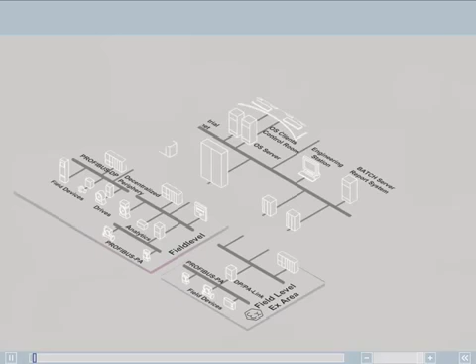The aim of any migration is the modernization or expansion of an existing technical base in a plant without the system crashing and without stopping the plant. At the end of the migration process, the existing system is supported by a far more powerful and more modern system: Simatic PCS7. In this section, you will find out more about this forward-looking process control system, the goal of the Siemens migration strategy. For genuinely comprehensive automation, Siemens developed totally integrated automation for the process automation market.

Totally integrated automation is a complete range of products, systems, and solutions for total vertical and horizontal integration in all process industries. Totally integrated automation is applicable to both the processing and manufacturing-oriented industries. Totally integrated automation opens up new potentials for increased productivity by integrating, based on a single platform, the entire production chain from incoming goods through production to the outgoing product.

At the same time, it connects all levels of the enterprise, from the field level to production management level to ERP level. Comprehensive integration with totally integrated automation also means the harnessing of hidden potentials due to continuous observation of the entire production life cycle. Simatic PCS7 is the totally integrated and homogeneous automation solution for all process industries. It is based on standard components of totally integrated automation, such as HMI, software, controllers, etc.

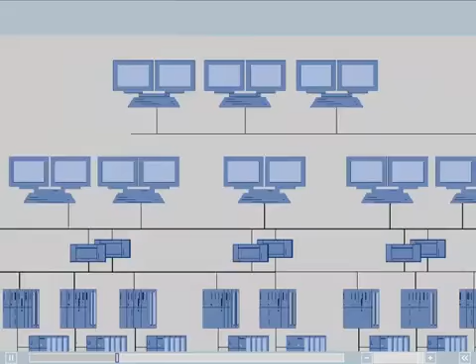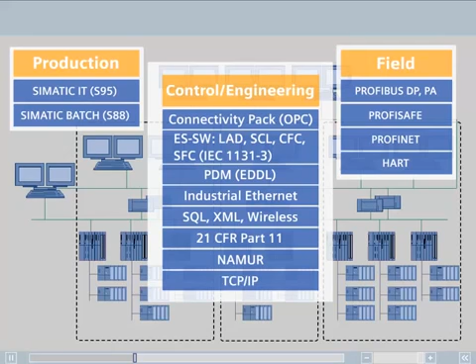Simatic PCS7 covers not only the process control tasks, but also the entire automation of all preliminary, follow-up, and parallel processes at a production site. In addition to the standard Simatic hardware and software components, Simatic PCS7 also uses standardized interfaces for data exchange, based on international standards such as Profibus or HART. At the same time, it also uses new, powerful technologies and internationally established industrial standards, such as IEC, XML, Ethernet, TCP/IP, OPC, ISA S88 or S95, and therefore remains open for future developments.

One of the major advantages of Simatic PCS7 is its scalability. It is equally successful in a small laboratory operation or in a large complex with over 100,000 IOs. This guarantees total flexibility when expanding functionality or the scale of the operation. With the simple inclusion of optional packages such as Simatic Batch or Simatic Route Control, the system can grow to keep up with users' demands.

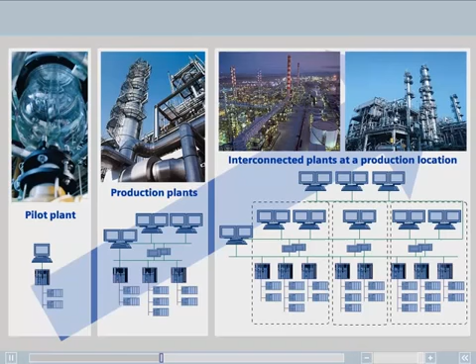To integrate distributed field technology, Siemens uses Profibus, the most successful field bus worldwide. Profibus is straightforward, resilient, and reliable. It supports redundancy and online expansion, and is suitable not only for standard but also hazardous environments. With its all-round scalable redundancy, our process control system increases the availability of every plant at all process control levels. This guarantees trouble-free operation and helps to avoid downtimes.

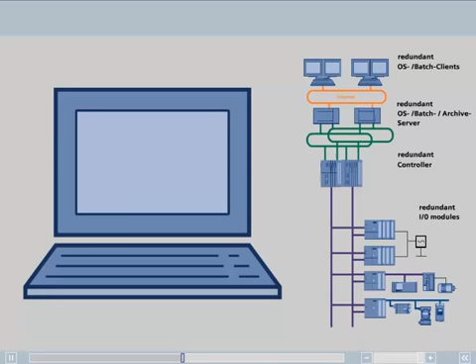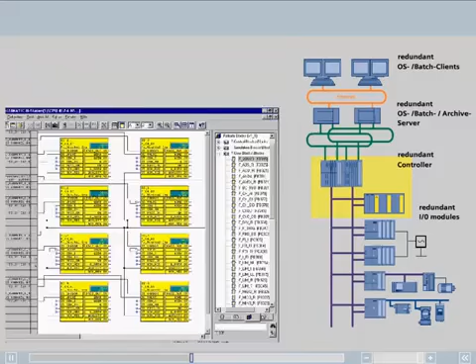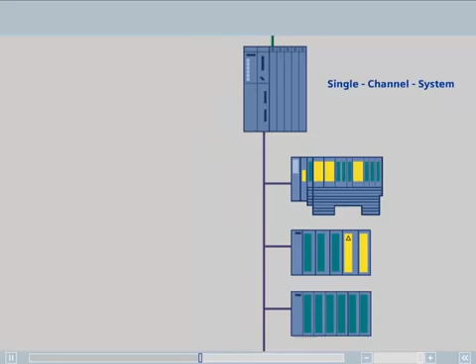Integrated fail-safe technology is a further step toward a fail-safe automation system. Simatic PCS7 is capable of recognizing process faults and internal errors. With configurable shutdown logic, the plant can be brought to a safe state. Fail-safe automation systems can be configured as a single channel, a fail-safe system with one CPU, or as a redundant system known as an FH system. We offer these safety features to our customers naturally with TÜV certification up to AK6 or SIL 3. The fail-safe configuration is created with the standard PCS7 engineering tool.

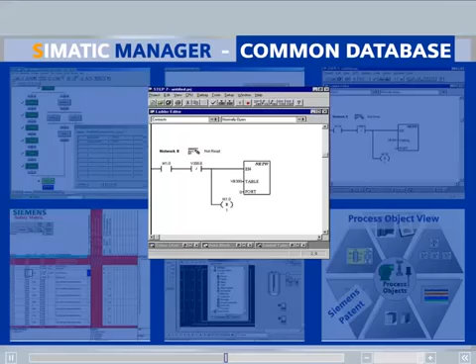All Simatic PCS7 hardware and software components are configured with a single engineering system. Thanks to a user-friendly, fully graphical user interface, a technology-oriented configuration can be created without any programming knowledge. The engineering system of Simatic PCS7 has a set of complementary tools for system-wide project-oriented engineering, from configuration of field devices to redundant and non-redundant applications, right up to configuration of fail-safe applications.

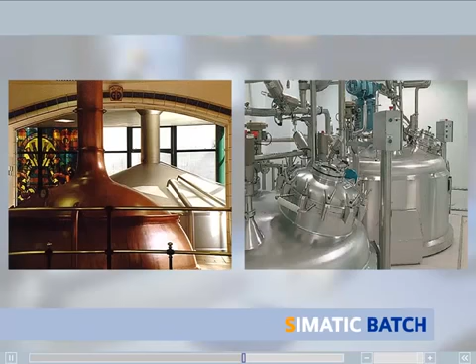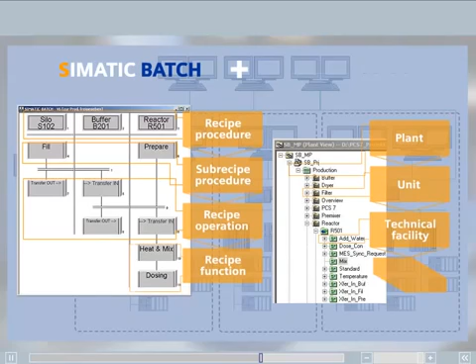Simatic Batch can be used for process plants with complex batch processes or regularly changing control sequences. This is an option that is completely integrated in the operator control and monitoring strategy and in the engineering of Simatic PCS7. Simatic Batch can be configured either as a single workstation system or as a client-server system, and because of its modular architecture and flexible scalability, it can be used in process cells of any size. Together, Simatic Batch and Simatic PCS7 fully cover the process and recipe models described in the ISA S88.01 standard and simplify the process engineering-oriented creation of recipes.

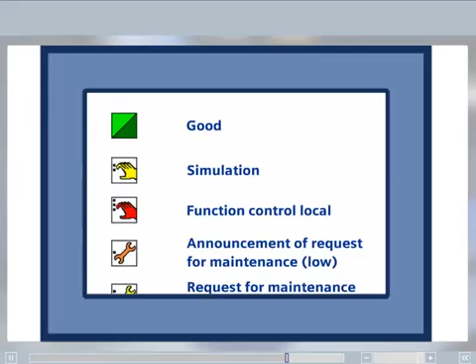To protect capital investment, we have introduced integrated asset management in Simatic PCS7, allowing predictive maintenance, repair, and servicing. We place particular importance on automatic functions for monitoring field devices and other plant components by acquiring measured values that characterize the status of equipment and machines. With Simatic PCS7, the process control system in the enterprise-wide automation system for totally integrated automation, you have Siemens quality from one source. All the system components are developed and maintained internally.

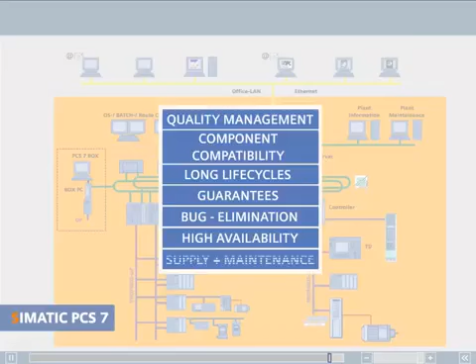Operator control and monitoring systems, flat screens, PCs and input devices, OS servers, archive and batch servers, controllers, network cabling, standard PLCs and text displays, field devices, analysis devices, compact controllers, drives, drive controls, low voltage switchgear, and MIS/MES components. What this means for our customers is comprehensive quality management, tried and tested component compatibility, products with a long life cycle, comprehensive guarantees, fast elimination of bugs, high availability, and long-term availability of supply and preventive maintenance. This, of course, also includes worldwide service and support around the clock.

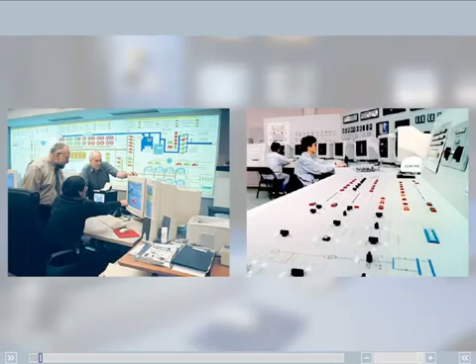According to international studies, there are several thousand plants worldwide that require thorough modernization, or at least expansion, to keep them competitive in the market. This means that the topic of migration, especially with regard to process control, is becoming increasingly more important to plant operators, since migration generally means the staggered transition to a new technical generation.

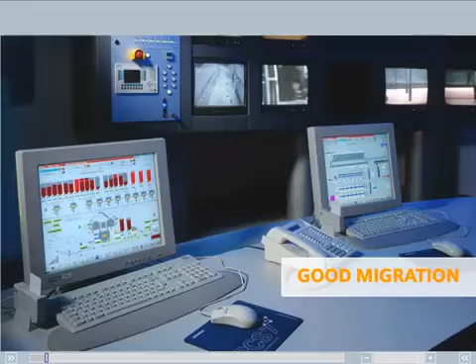Accelerated by the waves of innovations in IT and PC technology, the life expectancy of process control systems has changed drastically. While a working life of 16 to 20 years for engineering and operator consoles was considered normal in the 80s, today such life cycles have been reduced to about 5 years. The short innovation times have less effect on closely process-related components such as controllers, I/Os, or field devices.

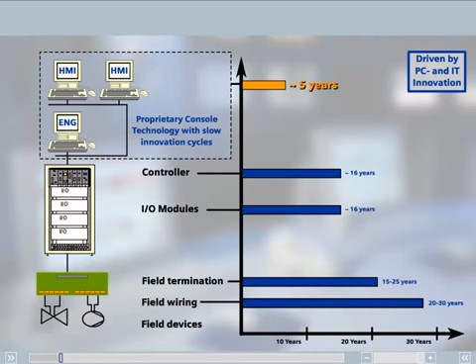Operator control and monitoring systems, or HMI, on the other hand, are under much greater innovative pressure and are therefore renewed much earlier. To guarantee the functionality of the plant, old and new must be integrated side by side throughout the plant. There are numerous reasons why migration to modern state-of-the-art systems becomes necessary.

The risk of failures increases greatly in plants that have been in operation for decades. The vendor of the process control system being used decides to terminate further support for the system. The costs for upgrades, expansions, and for maintenance increase rapidly for old systems. The existing system no longer meets the current requirements. It is simply no longer possible to expand the system as would be necessary to remain competitive.

In times of increasing production demands caused by pressure from end users and increased expectations in terms of quality, the inability to expand alone often makes migration the only possible option. The customer can, however, expect even more from a successful migration. Low downtimes in operation thanks to migration. Protection of investment in hardware and software. Long-term reliable operation of plants. High standards of quality of the new components. Simple operator control. And very maintenance-friendly.

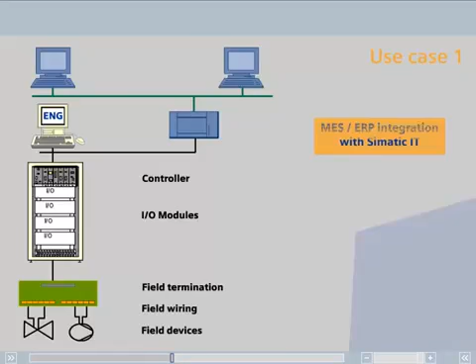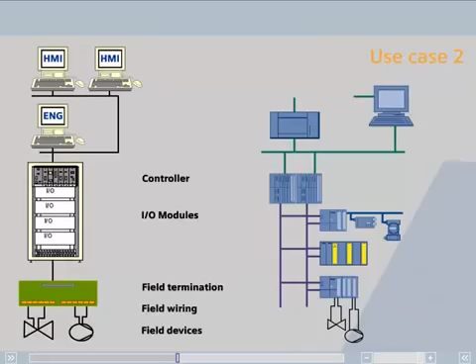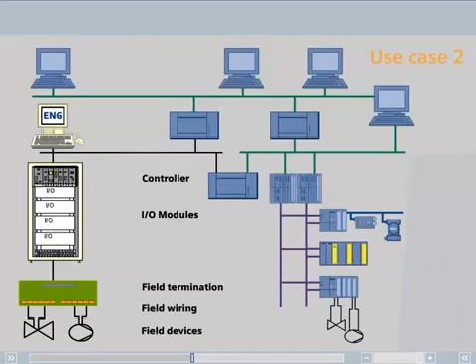When expanding an existing plant, the old system initially remains in place. Only new plant sections are equipped with Simatic PCS7. Old and new continue side by side in mixed operation, with a common operator interface. Controller communication is implemented using a gateway. This gradual modernization, starting with the new plant section, provides not only greater transparency for the operator, but also functional expansions such as field bus technology, IT integration, and totally integrated automation, etc. As requirements grow, the system can be further expanded with Simatic PCS7.

The discontinuation of a process control system by the vendor, in other words, discontinuation of further development and support, is the main reason for a comprehensive plant modernization. The need for functional expansion, or the desire to avoid plant downtimes, can also be the motive for modernization. Whatever the reason, the old control system is replaced by the modern, forward-looking Simatic PCS7 process control system. In some cases, without interrupting plant operation, the existing field devices are connected over termination adapters. This protects prior investment such as field wiring or hardware components, as well as the valuable application engineering.

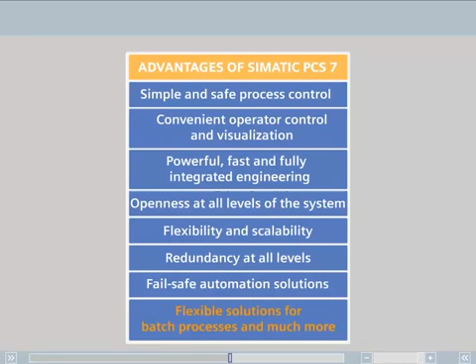Following modernization, all the advantages of Simatic PCS7 as part of totally integrated automation are available, such as simple and safe process control, convenient operator control and visualization, powerful, fast, and fully integrated engineering, openness at all levels of the system, flexibility and scalability, redundancy at all levels, fail-safe automation solutions, flexible solutions for batch processes, and much more.

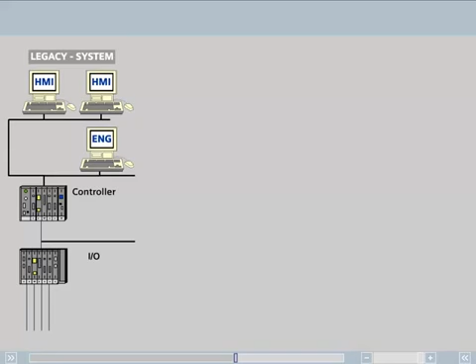We support these three typical migration situations in each individual step with the products we have developed. 1. Replacement of the old system with the Simatic PCS7 operating system that controls the plant moving forward. 2. Creation of the engineering libraries for PCS7 AS and OS, FP. Here, the valuable configuration information from the old system is adopted.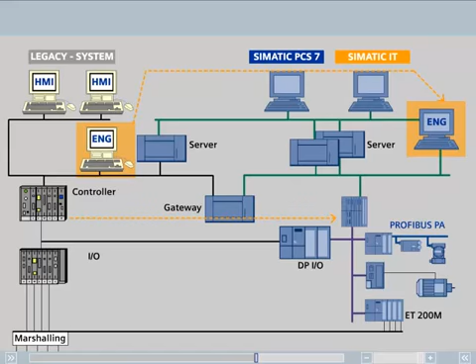3. Introduction of network gateways, developed for trouble-free exchange of information. 4. Creation of interfaces to PCS7 for I/O modules of other vendors. 5. Use of field termination adapters for PCS7 that ensure that the existing field wiring is retained. Each step is supported by specific services.

Within the concept of our individual migration strategies, the migration products rank equally alongside standard products. For our customers, this means worldwide guarantees of sales support, regular preventive maintenance, hotline support, reliable support for all system components, long-term reliable operation of plants, and secure investment in migration. At the same time, the maintenance of existing older systems is also part of the Siemens strategy.

It goes without saying for Siemens that migration of our own control systems to Simatic PCS7 is an essential cornerstone of our continued business relationship with our customers. Since 1996, we have been providing migration solutions for the smooth transition from Teleperm M to Simatic PCS7 and have modernized thousands of plants. In the meantime, we have also successfully implemented migration procedures from APACS+ and Simatic 505 to Simatic PCS7. In recent years, Siemens have proven their expertise in numerous successful migration projects.

Our specialists worldwide have years of experience in engineering, commissioning, and service. They can inform you about the migration options, analyze the plant, advise you individually, and then provide you with a detailed proposal. Today, we can also offer migration solutions for control systems from other vendors, such as Bailey. Migration solutions for other vendors such as Emerson, Honeywell, Invensys, and ABB are either being planned or on the way.

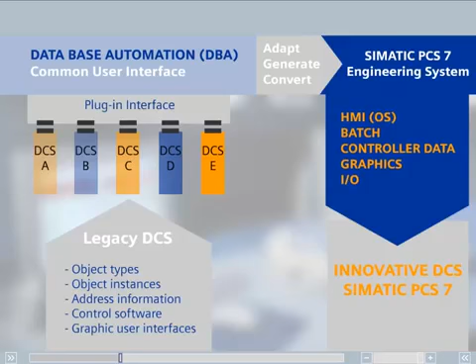This technique creates a universally valid migration infrastructure that permits simple docking to different process control systems, thanks to the module architecture. DBA allows migration of OS, batch, and controller data, and creates a consistent look and feel for every control system migration. DBA is, of course, fully integrated in the engineering system of Simatic PCS7, allowing genuinely uncomplicated and homogeneous migration to the PCS7 target system. This has been proven in many migrations from our own as well as from various systems from other vendors.

DBA transfers the process data of the old system to PCS7. This includes the plant view or plant hierarchy, process tag types and process tag instances, standard faceplates, batch data, recipes, etc. Siemens also provides a graphics conversion service with which existing graphics of certain old systems can be converted for use in PCS7 at a fraction of the cost of a new configuration.

The migration technology described here is incorporated in the migration products that are now available on the market as standard products for a variety of old systems. Care was taken to ensure that these products fully support the typical use cases with which you are familiar.

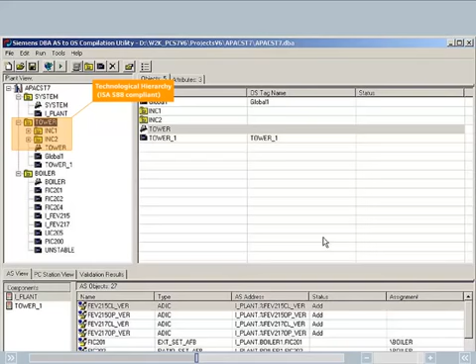To complete this section, let's have a brief look at the user interface of DBA. In the next section, the practical part of our presentation, you will see its strengths in greater detail. The hierarchical plant view, complying with ISA S88, is used to group and display a project according to technological aspects. Process objects are presented clearly according to the plant hierarchy.

The process object view displays all aspects of the individual process objects in the form of a table. Here, names, types, and addresses on the controller are displayed, and their relationships indicated.

This section provides 3 typical conversion examples. The procedure will use an APACS+ conversion as the example, but the procedure for other systems like Infi90 from Bailey is the same. In the first use case, the existing APACS+ system operator station is to be replaced with a new PCS7 operator station in a client-server architecture.

The PCS7 APACS+ OS server is connected with the system bus, the M-bus, and therefore has access to the subsidiary APACS+ controllers. Via the OS Ethernet network, the PCS7 OS clients are connected to the engineering system. All the engineering is done on the engineering system, and from here the application software is downloaded to the server and the client.

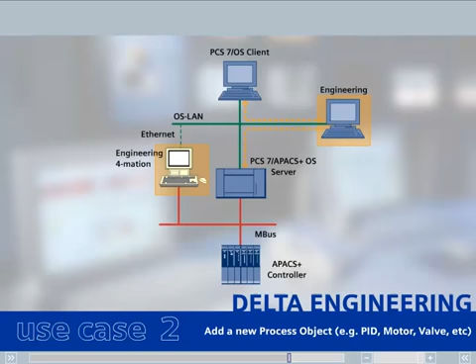In the second use case, we would like to show how the existing plant can be extended by a new measuring point, using the remaining legacy engineering console 4-mation. This change will be detected in the engineering system, and the changes are downloaded into the PCS7 APACS+ OS server and the PCS7 OS client, online.

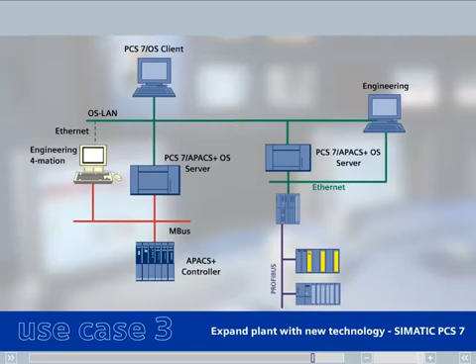In the third use case, the existing plant will be extended by a sub-plant based on Simatic PCS7. In addition to the present server, an additional PCS7 OS server will be added and connected to the OS network as well. Based on that connection, the operator, sitting on the PCS7 OS client, has a common and consistent monitoring and operating for both parts of the plant.

Welcome to the practical part of the multimedia presentation, Migration Strategy of Simatic PCS7. Here, we would like to present 3 different migration use cases. The first migration use case shows how an existing HMI is replaced by a modern PCS7 operator station. You will see how the migration products work and how easy they are to work with. You will also see how the migration products not only save a tremendous amount of time and effort, but also how they exclude accidental errors right from the beginning.

In the second use case, a process tag is added to an existing plant. This is inserted online in the operator station during operation without affecting process control. In the third and last use case, a plant is expanded by a new section using PCS7. The operator should be able to control and monitor the new section of plant alongside the previous or legacy system.

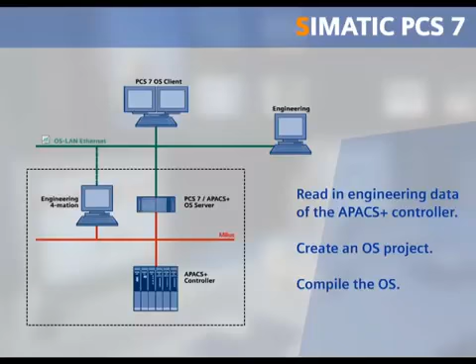In this use case, an existing database with the engineering data of an APACS+ controller will be read in by DBA, and the picture hierarchy will be set up for the OS in DBA. An OS project will then be created, and this will be specified as the target project for all pictures. In the last step, the OS is compiled, and the tags, messages, and picture hierarchy are automatically created with all the necessary pictures. The block icons of the process objects are also created, and they are assigned to the faceplates.

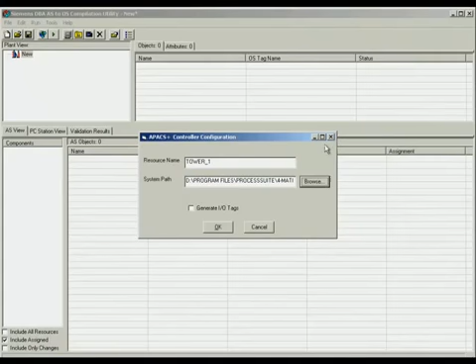The first step is to open a new project in DBA and to browse for the engineering data of the 2 controllers to be controlled and monitored from the operator station. The databases I_PLANT and TOWER_1 have the status changed because the objects that have been read in have not yet been used on the OS.

The Update Controller Objects function reads all objects contained in the 2 controllers and displays them in the table with their names, types, and addresses on the controller. The assignment column is empty, since no process object has yet been assigned to an OS. By selecting a controller, the corresponding process objects are displayed.

With the Auto Assign function, all the process objects of Tower1 are assigned to a Templates folder in the plant hierarchy. The Templates folder has a subfolder called Tower1, and this, in turn, has 2 further subfolders with the names Inc1 and Inc2. Inc1 and Inc2 are hierarchy levels that already existed in 4-mation, the engineering tool of APACS+.

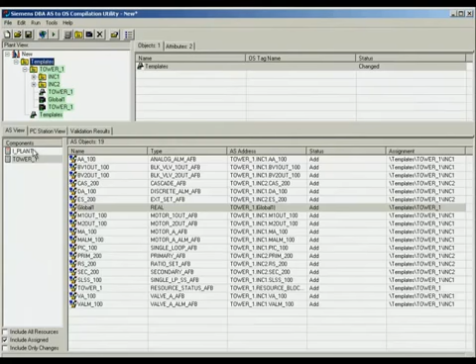Here, we can see one of the advantages of DBA that always pays dividends when the original engineering data has a hierarchical structure. DBA then evaluates this and automatically sets up the picture hierarchy accordingly. As always, you have the option to set up the picture hierarchy manually, based on your own criteria. The procedure for I_PLANT is analogous. For the picture hierarchy on the OS, the two folders are now moved to the first level.

The objects remaining in the Templates and Templates 1 folders are not required on the OS, and both folders are therefore deleted. The name Boiler 1 is now changed to Boiler, and Tower 1 to Tower.

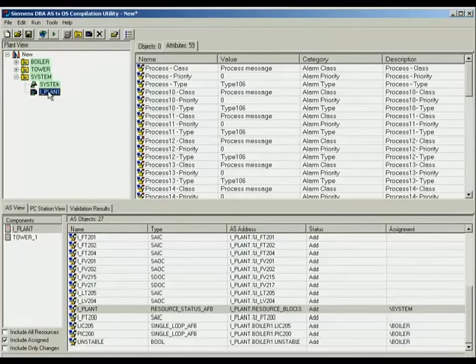To obtain an overview of the status of the I_PLANT controller, the resource status is stored in a separate picture. In the overview of the OS, System will be the first entry, followed by Boiler and Tower. System is therefore located at the top of the plant view hierarchy by DBA.

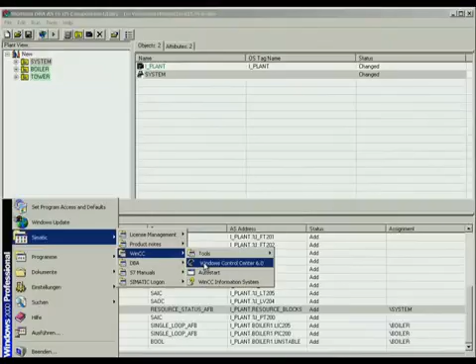The OS can only be compiled if the OS project has been created and assigned in DBA. The OS project is created in the Windows Control Center. The project editor then needs to be run, so that various basic settings such as the resolution of the monitor can be made, and to copy required files to the project.

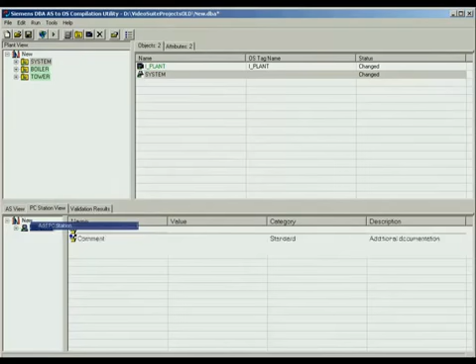A screen resolution of 1024 by 736 is used here instead of the recommended 1280 by 1024 or 1024 by 768 screen resolution, in order to achieve the optimum picture quality in the video. The project does not yet contain any tags or other project-specific data. After the OS project is created, it is assigned to DBA. In this dialog, we select the server application type and assign it to the OS.

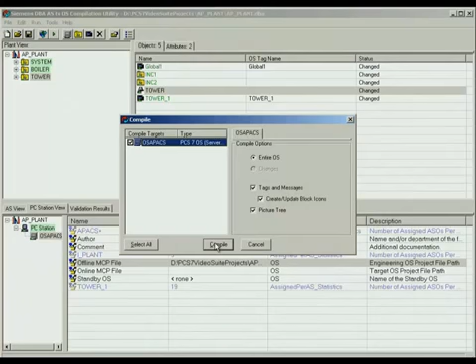The picture hierarchy objects must now be assigned to the OS. This is necessary because a DBA project can include several operator stations. The DBA project is saved in the path of the OS. And the OS is compiled. The first time the project is compiled, it is compiled completely. The tags, messages, block icons, and the picture tree are created. This completes all the work in DBA.

The tags were inserted in the OS project. The block icons were created in the pictures, such as in the boiler picture. And INC1 picture.

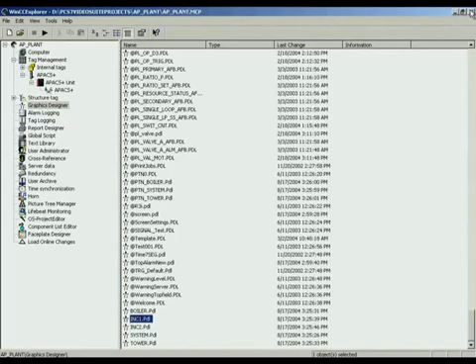The next step is to create the server package. Here, the name of the server is entered. Finally, enable the Online Changes option. Once the user settings have been made in the background, the project is closed. The server is then downloaded.

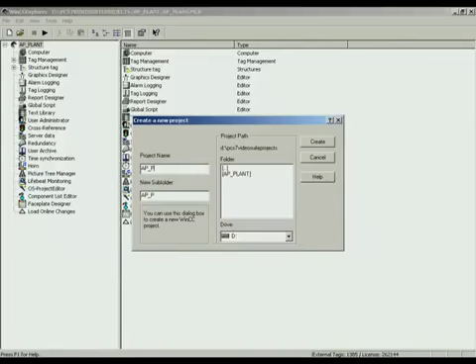Next, the client project is created, and the server package of the server is loaded and downloaded to the client. The client project is therefore created first. The project editor is started. The screen resolution is set to 1024 by 736 again, and closed. The server package is now loaded.

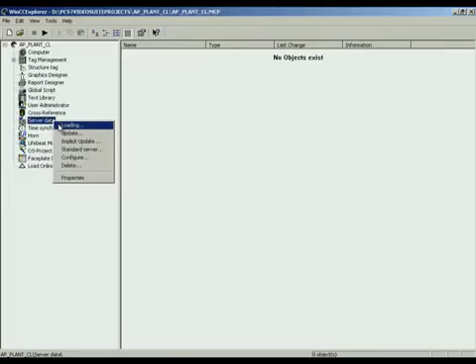The server package has been loaded. Once again, the user settings are made in the background. The project is now closed. In the last step, the project is downloaded to the client.

The server has been started in the background. The client project has been opened on the client PC. The project is now activated. The overview on the client shows the structure defined in DBA. In Tower, one picture level was created with the pictures INC1 and INC2.

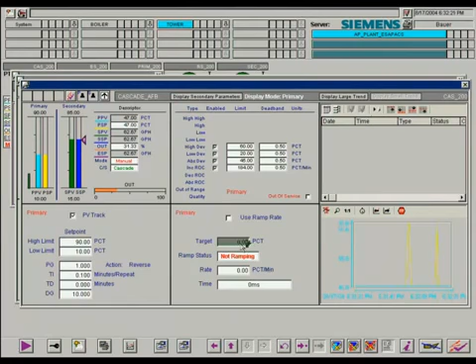The block icons of the objects assigned to the pictures in DBA were created in both pictures. The block icons were also connected to the appropriate faceplates. Working with the faceplates is exactly the same as in standard PCS7. However, as in all the migration products, the block icons and faceplates have been adapted so that the operator recognizes the previously familiar user interface in the new HMI system. This reduces the potential for operating errors.

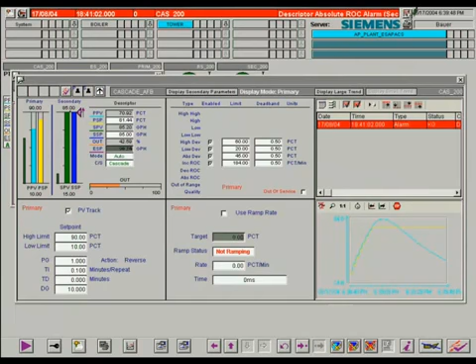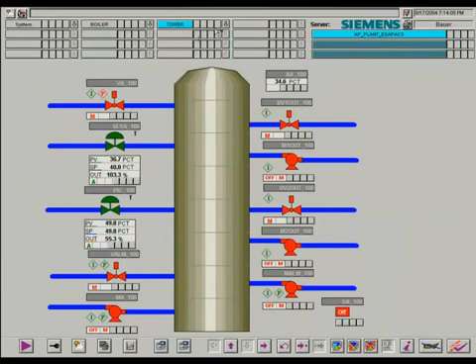The block icons have also been generated in Boiler. The pictures shown were generated in the background using the existing block icons on the engineering station. The new pictures were based on pictures migrated from the previous APACS+ HMI system. When selected, the pictures are displayed with the modifications. This completes the first use case.

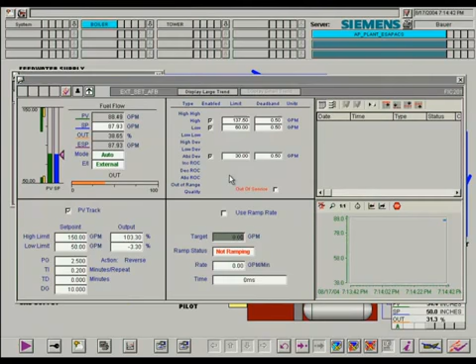You have seen how simple it is to configure Simatic PCS7 OS with DBA from the engineering data of 4-mation, the engineering tool of the APACS+ and QUADLOG process control system. The automatic sequences drastically reduce possible migration errors. As you have seen, the picture hierarchy, all tags and messages, the block icons, and their faceplates are automatically generated.

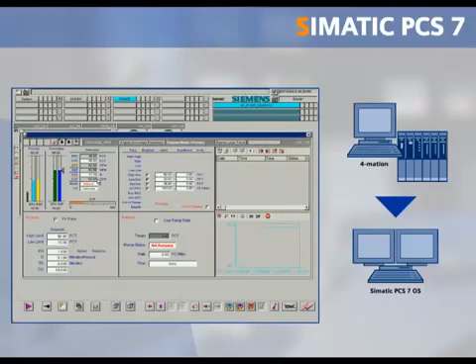It is clear from this example that using DBA and the migration products can save you time and engineering effort when migrating from your old HMI to PCS7 OS. You now know how DBA works based on the example of APACS+. The steps to migrate the HMI components of other process control systems are similar.

In the second use case, we assume that a new motor has been installed in the system and that the engineering was completed successfully with 4-mation. The data on the APACS+ controller was, of course, modified at the same time. DBA is now used to update the PCS7 APACS+ OS server with the new configuration information.

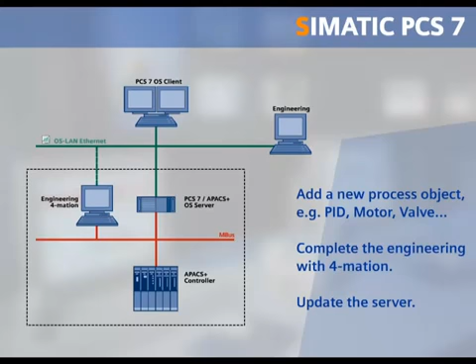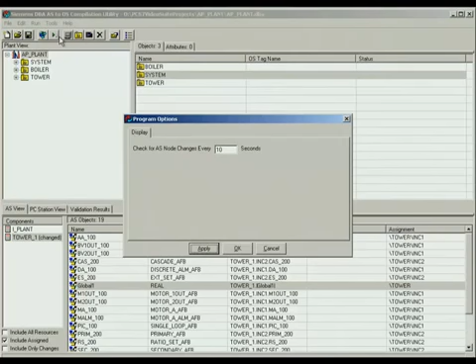After starting DBA, the status of Tower 1 is set to the Change status after 10 seconds. This is the default DBA database update frequency. The cycle within which the existing databases are checked for changes can be set here.

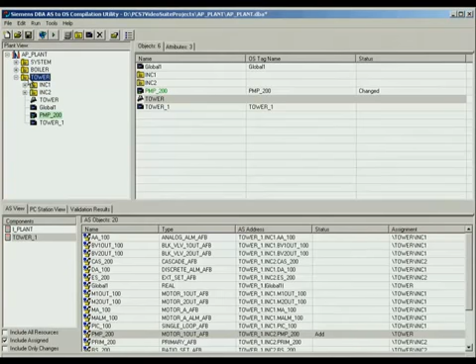After updating the controller objects, the motor PMP200 is displayed in the table. This motor is assigned to the picture called Inc2. The OS is now compiled to implement the changes. Since the configuration changes do not affect the picture hierarchy, the option to generate the picture hierarchy is disabled.

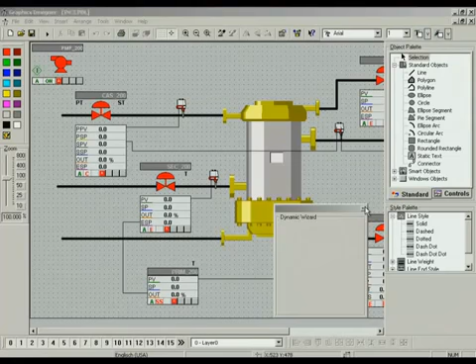The block icon of the new motor with the name PMP200 has now been inserted in the Inc2 picture, and its tags generated. The block icon of the motor is placed at the top left. It is now moved to the correct position. The picture is saved.

The changes must now be downloaded to the server. The download is made while the server is running. The changes become visible the next time the operator opens the Inc2 picture. The client is updated automatically by the system, and this does not need to be restarted by the operator.

The operator working on the client was not affected by the change. The next time the Inc2 picture is selected, the operator will see the block icon as it was created in DBA and moved in the Graphics Designer.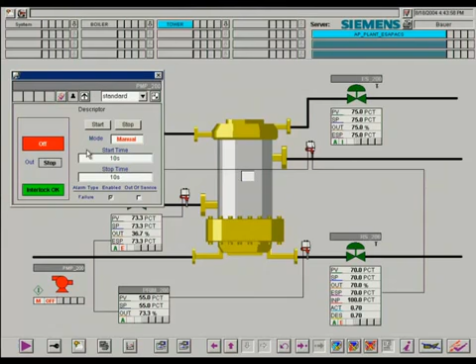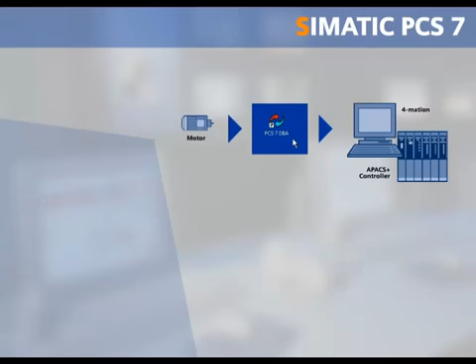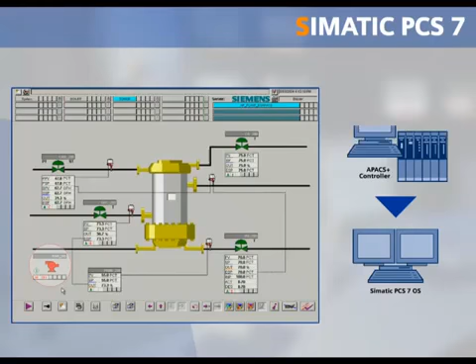As you have seen in this use case, changes made on the controller are automatically detected simply by DBA and included in an operating OS without stopping the process and without affecting the previous migration. When using the migration products of Simatic PCS7, you can optimize and maintain your previous system with the familiar engineering tools and include these changes in your HMI system without stopping the process and with minimum effort, even when no redundant OS servers are used.

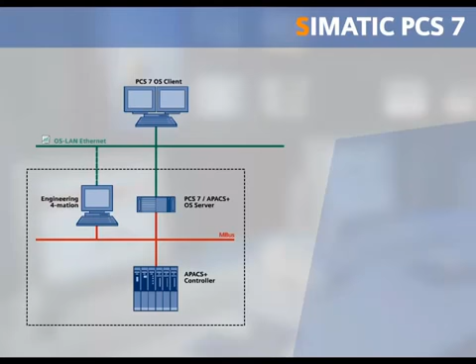In this third use case, a new plant area is added to a plant that is currently automated with APACS+ controllers and PCS7 OS HMIs. You will see how this migrated automation system can be expanded with Simatic PCS7 components to automate the new plant area. While the operator could previously only control the plant section automated with APACS+, the aim now is to give the operator on the OS client access to the new plant section.

The project of the new plant section is stored on the engineering station that we used earlier for engineering the APACS+ PCS7 OS. A new Simatic PCS7 project is created to control the new plant area. Simatic Manager is used to configure this plant area. Using Simatic Manager, a new Simatic PC station is created and named APACS. A PCS7 OS application is added.

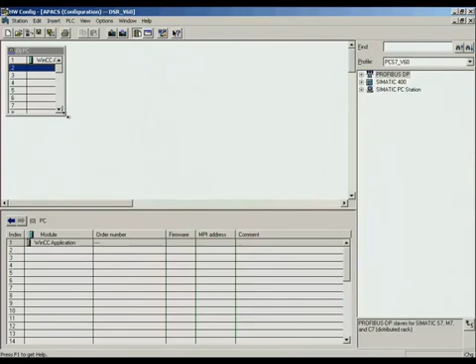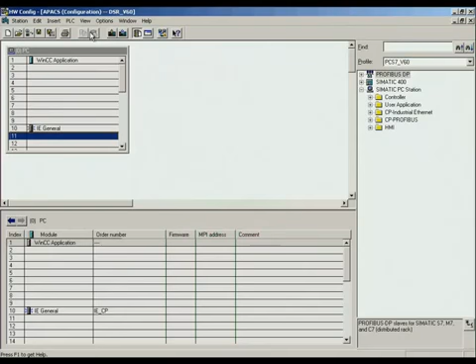The Ethernet adapter is inserted according to the setting in the APACS server at index 10. The ISO protocol is enabled and the MAC address of the server entered. The configuration is compiled and downloaded to the APACS server. The OS is given the name AP Plant. This corresponds to the name of the APACS+ project.

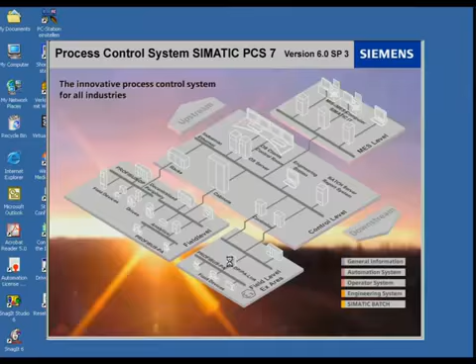Simatic Manager is closed, and the APACS+ project to be included is copied to the Simatic Manager project folder. Simatic Manager is reopened. The project path was entered earlier in the display properties of the APACS OS. The package was generated and the project downloaded to the server.

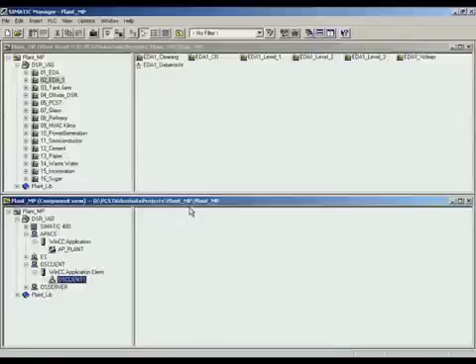In this use case, the intention is to be able to control and monitor both the existing and new plant sections using the same PCS7 OS clients. At this point, load the APACS server package on the client. The changes on the client can now be centrally downloaded using the PCS7 Make dialog. This completes the ES engineering.

The client is activated. The overview of the APACS server is displayed. The pictures of this server can be selected just as previously. The server with the section automated with Simatic PCS7 can be selected here. The overview of this server is displayed. The pictures can be selected as normal.

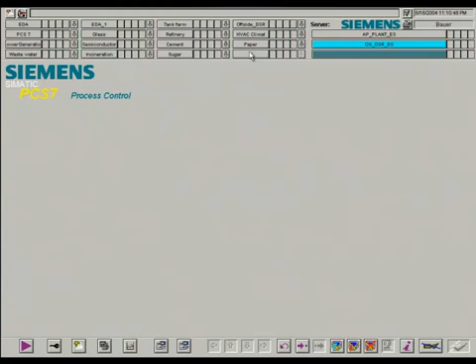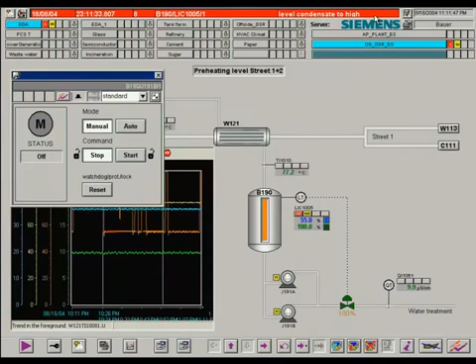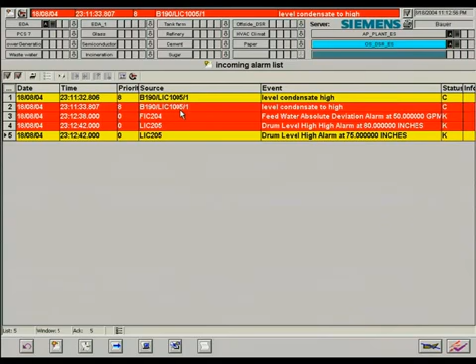The motor called J191B can, for example, be operated as normal using the appropriate faceplate. Stopping the motor leads to overflow in tank B190 and triggers a warning and an alarm. The warning and the alarm are entered in the alarm list. In the APACS controller, an alarm was triggered by FIC 204 and LIC 205. These alarms are now also shown in the alarm list. One particular advantage for the operator is that the alarms are displayed by both plant sections together and in the correct chronological order. This completes the third use case.

You have now seen how simple it is to expand or modernize an existing plant. In the video examples, an APACS+ system was updated to use the modern PCS7 OS HMI. Changes were made to the updated system without shutting down the original process. And in the event of a process expansion using PCS7 components, the existing and new process areas can seamlessly share the same PCS7 OS clients. APACS+ is, however, only one of many possibilities that could illustrate the migration potential and integration potential of Simatic PCS7.